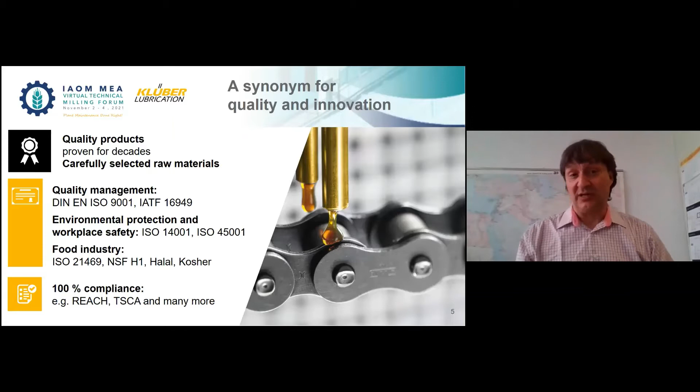All the lubricants for the food industry we manufacture are going hand in hand with halal and also with the kosher requirements. All the raw materials we use for the lubricants are 100% in compliance with REACH and with the TSCA approvals. Maybe you have heard about this one. I don't know. We will also come to this in a later step.

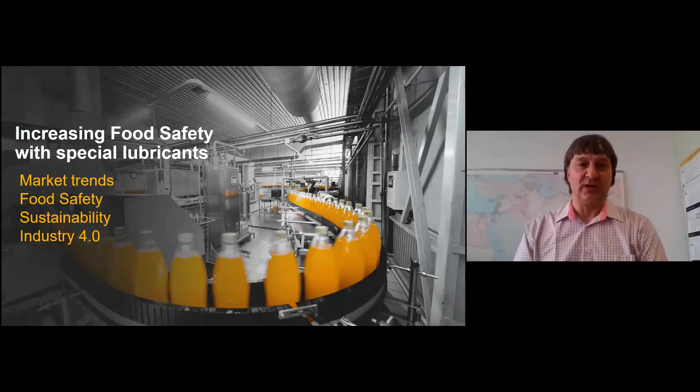So I was told to explain a little bit the details, what exactly is a lubricant. I don't know exactly if you are a specialist, if you're coming from maintenance or whatever is your job in your company, but to explain what a lubricant is used for. My experience from the market or when visiting customers is that the majority of people underestimate the part a lubricant is playing in the production or in the machine.

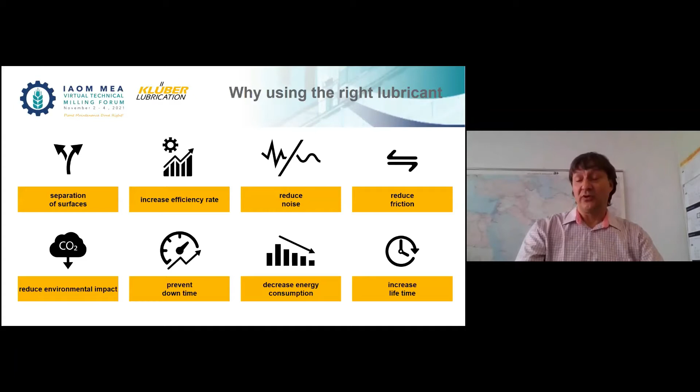So you can see here on the screen, lubricant is mainly used for the separation of surfaces. And if a surface is not separated, what can you hear then? You can hear these squeaking noises. And as soon as you have a noise, you have friction. And to reduce or avoid this friction, this is what the lubricant is used for. So when you have a machine which is well lubricated, you can, of course, prevent downtime and have less maintenance for the machine. A well lubricated machine is also decreasing the energy consumption. And of course, the lifetime of the machine is increased.

So a lot of people have heard about lubricants and they talk about a grease and an oil. And the third main part of what we consider to be a lubricant is a paste. So what exactly is the difference between an oil, a paste, and a grease? First of all, the material which is lubricating is always the oil. So this means even if you have a grease, the oil is the part which is giving the lubrication to

the machine. So an oil is basically an oil, and we put some additives into it; maybe the most well-known one is corrosion protection. And depending on what type of oil you want to manufacture, you add up to 10% of different additives.

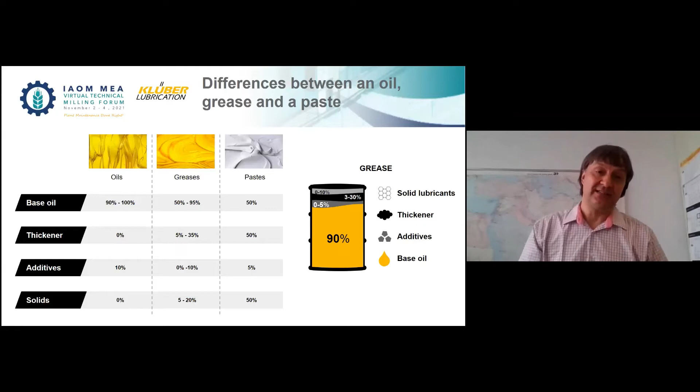So the big difference between oil and grease is that a grease contains a part which we call the thickener. And maybe the easiest way to understand what a thickener is, you can compare it with a sponge. A thickener is a kind of sponge which contains the base oil. And if you apply this grease on the lubricating point, the sponge will release the oil part by part.

And besides the thickener, of course, the grease also contains additives. Sometimes, depending on the application, a grease also contains solid lubricants. Solid lubricants are mostly used, for example, if you have a very high temperature and the temperature makes the oil or the base oil evaporate; then you still have the solid lubricants which can take over the lubrication.

So, just a quick look at the paste. The difference between a paste and a grease is the amount of thickener. You can see in the chart that a paste can have up to 50% thickener. So this is a very huge part, and of course a paste also contains additives, and the paste normally also contains a lot of solid lubricants.

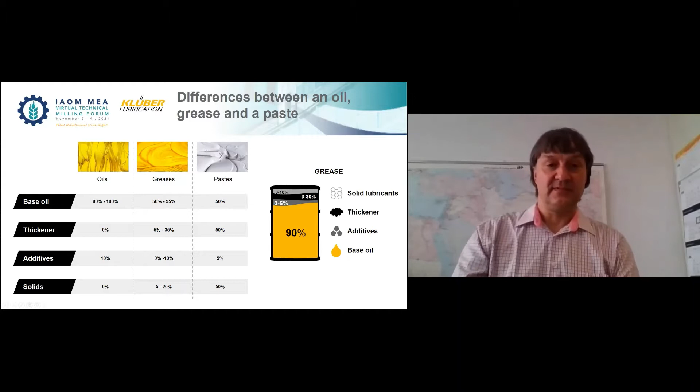And for those of you who have no idea about this, let's compare it. Water, if you take it as an example, has a viscosity of 1. So an oil with the viscosity number 2 is a very liquid, very thin oil. The viscosity is always indicated at 40 degrees Celsius. And the higher the temperature gets, the lower the viscosity gets, meaning the more liquid the oil gets. So very easy to understand.

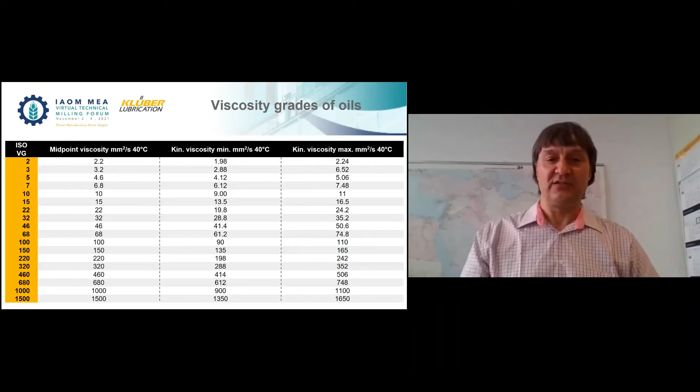So, talking about additives which you put into the oil or into the grease. I already mentioned the corrosion inhibitors, but we have much more. Maybe one of the other famous ones is the so-called EP additive, the extreme pressure additives. When I visit customers, I always hear we are using EP2 grease. So this is a standard grease which has an NLGI class, softness class 2, and is additivated with some EP additives. This is a classical standard multi-purpose grease.

We have anti-wear additives, sometimes UV indicators, just to prove whether the oil is where it should be. You can use a UV lamp, and the UV additives will show that the oil is still there. We have pour point depressants, antioxidants. So these are all different additives which are put into the oil or into the grease.

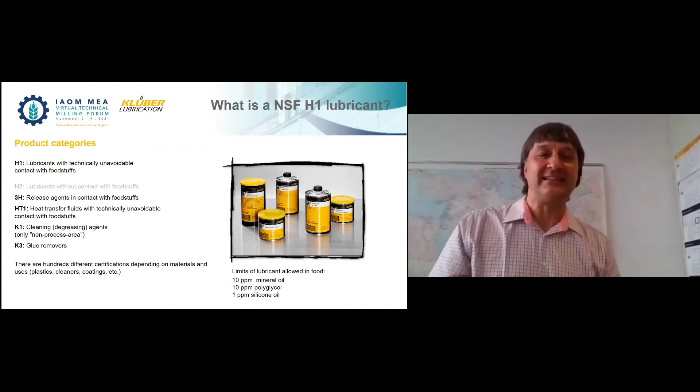Okay, I already mentioned H1 lubricant. So what is an NSF H1 lubricant? So, yeah, okay. Here at this point, I will hand over to Paolo, who is directly coming from the food team. He is more able to explain in detail what H1, H3, and so on is. So Paolo, please. Yeah. Thank you very much, Andreas.

Hello, everybody again. So now we go a little bit deeper into the topic of food grade lubricants. What are the registrations that allow us to call the lubricants food grade lubricants? So when we talk about greases, oils, and pastes, what Andreas explained to you some minutes before, there are mainly two registrations, H1 and H2. In the slides, you see more, and I will explain to you in a second what they are.

So when we talk about the NSF H1 lubricants, we talk about lubricants that can go in incidental, unavoidable food contact. So lubricants cannot anyhow get in direct contact with food, but we talk about incidental food contact, applications where you cannot technically avoid it. H2 is another registration that is, let me say, a lower level of food safety. So lubricants can be used in the food environment, in the food facility, when there is no way that the products can go in contact with foodstuff. Yeah, it's in light gray, and I will tell you in the next slide why.

There are other registrations for products that are present in our portfolio. The first one that is pretty important for some applications is 3H. This is not a mistake. We didn't invert it. It's because there is a number in front instead of a letter, because we talk about another category of products. Here we talk about a release agent that can go in direct contact with food.

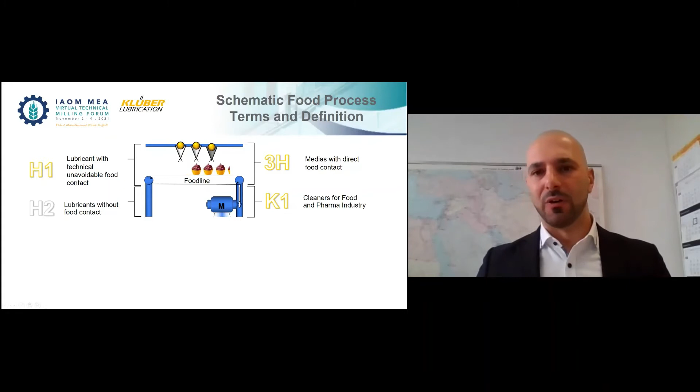Why is it obsolete? Of course, in the food industry, it's really important to avoid risks. Risk can be brought by the machine, by the condition of the machine where I work, the environment, but also by possible human mistakes. If you are in maintenance and you have to deal with a lot of stuff, a lot of components, and in your warehouse, you have a mix of H1 lubricants, H2 lubricants, and industrial lubricants all together without a clear classification, it's not easy, and it can happen that an operator takes the wrong product, for example, an industrial one or an H2, and uses it in a bearing that is above the line.

So our recommendation is to use H1 lubricants wherever you can. Nowadays, at least the Klüber lubricants are very high performing products. In the past, we thought that food grade lubricants, as they are developed with a limited list of raw materials, were not really performing. But we demonstrated rather the opposite. There are food grade products that we sell even in the steel industry, for example, because they are safer and they perform very well. So nowadays, you don't have this problem of food grade lubricants' lower performance.

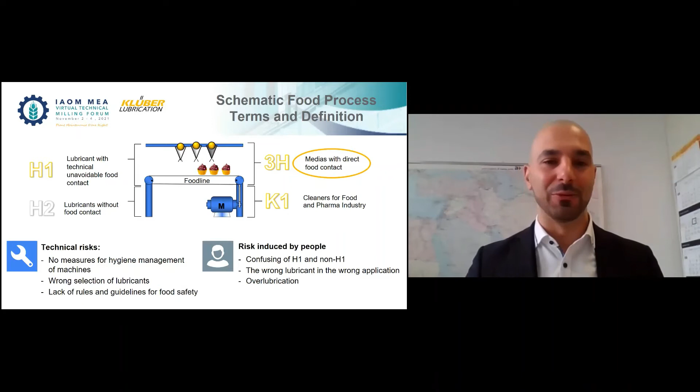No, rather the opposite. The 3H, as I said, can be used on the conveyor of your line. Usually they are very thin film oils, low viscosity, as Andreas explained before, to release the food from trays or for conveyors. Whenever you need to clean your components, when you dismantle a bearing, for example, and you have to inspect the bearings, remember to use the NSF K1 cleaner. This means that the solvent and the cleaner that remain a little bit on the surface of the bearing will not be toxic, will not be dangerous, so you can install your bearings back on the line without changing them. Yeah.

Now there is another very delicate point. Why are these certifications important? Because, in general, industrial lubricants, low-performing lubricants, cheap lubricants, could contain dangerous substances. One example that is very important in the market is two substances that are called MOSH and MOAH. MOSH and MOAH stand for mineral oil saturated hydrocarbons and mineral oil aromatic hydrocarbons.

Sometimes the market confuses MOSH and MOAH with mineral oil in general. So we think that if we use a product based on synthetic oil, it automatically doesn't contain MOSH and MOAH. This is not true, it's too easy. MOSH and MOAH are two fractions of the hydrocarbon chains that can be even inside synthetic lubricants or in some additives contained in the lubricants. And this is why we have to take real care in the choice we make of lubricants. Usually, the risk that food grade lubricants contain MOSH and MOAH is lower.

But the positive list of NSF is pretty old; it was created in the 1970s, so more or less 50 years ago, and it has not been updated. This positive list still contains, for example, medicinal white oils. Probably you heard about them. And as medicinal white oil is pretty cheap, there are a lot of cheap food grade products on the market that can be used in the food industry.

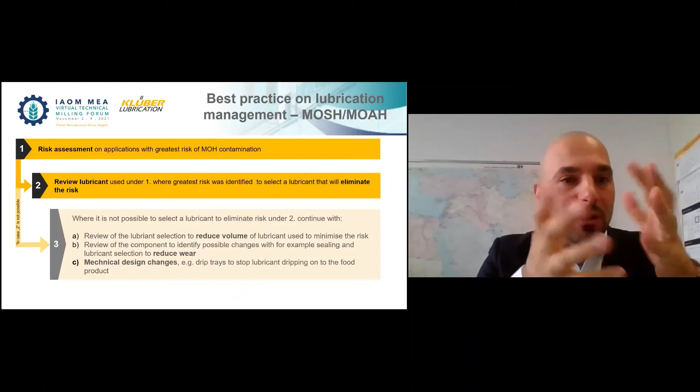We want to give you now some best practices, some examples of how to decrease the risk of contamination by mineral oil in general, and specifically by MOSH MOAH. Our first suggestion is to make, together with us or with your trusted lubrication partner, a risk assessment on the applications where you have the highest risk of mineral oil contamination. For example, a big gearbox or a fan ventilating some part of the machine in your line, and the product with the leak,

this is maybe one of the applications you should focus on first. The second step could be, once you have identified the most critical application, review the lubricant that you use. Ask yourself or your lubrication partner, is there any other lubricant that can help me minimize the risk? Is there a product that doesn't contain mineral oil or MOSH MOAH? There might be two answers, yes or no. And using a lubricant that doesn't contain MOSH MOAH at all is not always the best choice. This is why you need a specialized partner in this selection.

Why? Because MOSH MOAH are sometimes contained in the additive package, and the additive package sometimes gives special features to the lubricant. In the example of a gearbox that contains oil, a MOSH MOAH additive could give, for example, higher compatibility with sealing material. And you well know that seals are very important to avoid oil leaking out of the gearbox. So sometimes you really have to think twice with your partner whether a product that may contain traces of MOSH MOAH is still worth it for the application or not.

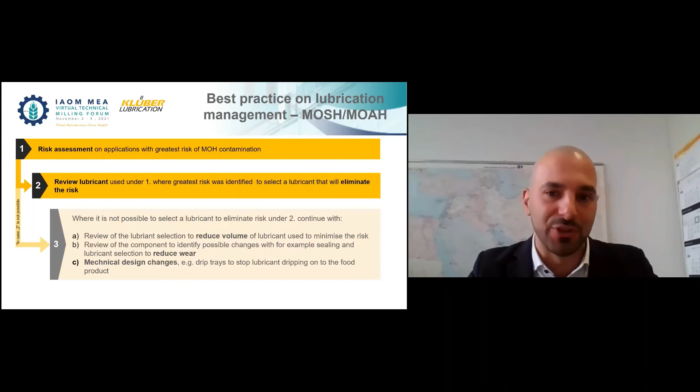Sometimes there is no solution. So what we usually do is talk to our OEM partners, component manufacturers, to help the food processing company improve the mechanical design of the machine: use different sealing materials, a different machine design that can prevent the lubricants from getting in contact with the foodstuff.

So how can we support you in this? Actually, Klüber has the widest range of NSF H1 lubricants. So there is a 99.9% chance that if you work with Klüber, there is a product that is NSF registered and is safer for your application.

As we said, when we visit your line, we also support you on reducing the risks. So we don't only focus on whether components, bearings, gears are well lubricated with the right lubricants, but we also have a look for you at the risk that this application is bringing to your production line. Is there a potential risk of leakage? Is the product really compatible with the materials that are in contact? So we go a little bit beyond.

We also help you to prepare lube charts, because we mentioned in the beginning human mistakes. Human mistakes can really cause massive contamination and be a potential danger to your brand and to your business. So we help you to create lube charts that are easy to be used by the operators, by the lubrication operator, for example, using different colors or different symbols in order to avoid the mix-up of H1 lubricants and industrial lubricants, and make sure that the right products go into the right application.

Okay, hello. Thank you, Paolo, for explaining this, especially the MOSH MOAH part. I think this was not very easy to understand for everybody, because this is something which is also quite new for us at Klüber. But I think meanwhile, we have a lot of experience with this one. And whenever you are confronted with MOSH MOAH, we are happy to support.

So let's have a look at market trends. The word which everybody hears every day is sustainability, and maybe also Industry 4.0. And what can we contribute on sustainability? One aim which every company has is always to reduce the materials which you use, to reduce the waste which you produce, also to reduce energy consumption, to reduce the emissions which your company is giving off during production, reduction of water consumption. Nobody normally considers how much water is used for producing anything. And finally, also to increase health and safety of your operation and of the products which you manufacture.

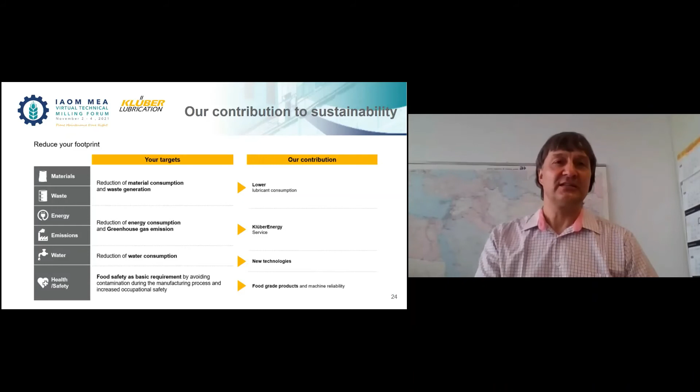So the contribution which we can give while manufacturing mainly synthetic lubricants is we can help to reduce the quantity of lubricant which is used for a certain application. We can help to reduce the energy consumption if you use the right lubricant for every application, especially synthetic lubricants, which automatically reduces your emissions. If you consume less energy, you will have less emissions during your production. While using food grade products, of course, you increase the health of the people working in your plant, because they are not coming in contact with dangerous goods, and you also increase the safety of the product which you are manufacturing.

Good. Lower lubricant consumption. What does this mean? If you have less lubricant in your production process, you need to buy less product, meaning you have lower transport costs. You have lower consumption during the use of lubricants, and finally you have less product which you have to throw away at the end of the service life. The correct lubricant selection will also improve the hygiene situation in your plant. You have less cleaning of the machine, and again, less lubricant disposal, and this also includes the packaging material and, as Paolo mentioned, for example, cleaning agents, which are not to be used in this case.